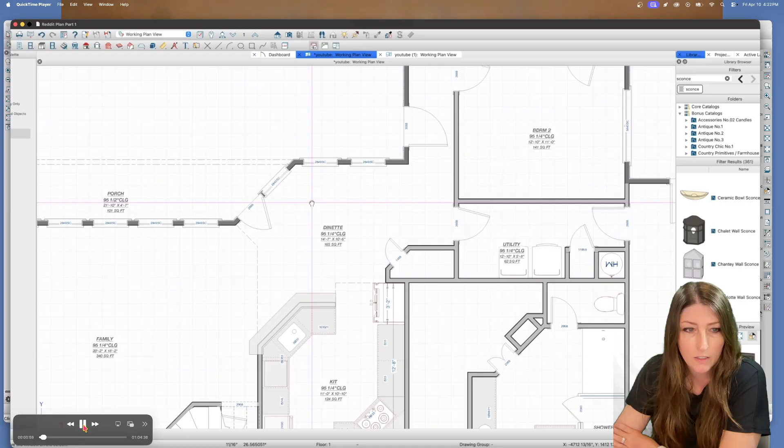And then we go on to the family room, which I thought was fine. This here is also a raised bar. I thought the kitchen was actually very well done, so I pretty much left it alone and then just made it look nice in the end. So this is a fireplace here.

So what do you guys think, first glance? Is it weird to you also, as it is to me?

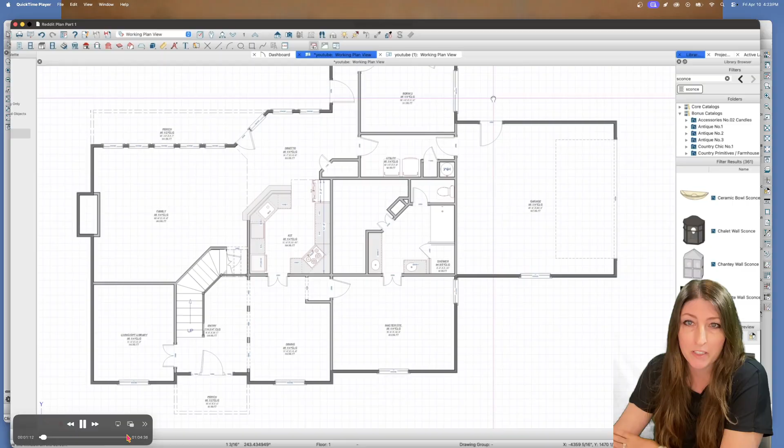Yeah, that's the plan, I'm going to redesign here. So I'm probably going to fast forward some. There's the second story right here, and this is what I'm going to show you in another video. It's showing a reference display, so the red is the main level, and it's showing you how these walls line up. That let me know on the first floor which walls I'm going to keep because they're likely load bearing.

In this case, you can see these rooms all lined up with the lower level, the main level. Right here on the original plan, it had this door, and this is a closet, which I thought was really strange too - again, that'll be part 2. Right here, they implied there's possibly another water heater and maybe a furnace, but other than that there was no other room for mechanical stuff, which I thought was weird.

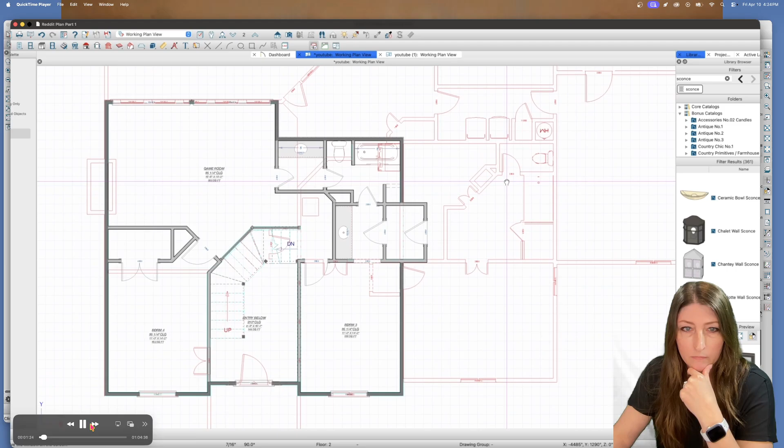We'll keep going though. So here's where I start to rebuild it. My goal was to create a hallway for the master bedroom. As you can see, I deleted this door.

I thought, okay, what I would like to do is move this bedroom and put it up where that bathroom was at, and then put the bathroom lower so that it's easier to access for everybody. Because if I had a bedroom, I wouldn't want it right by the utility.

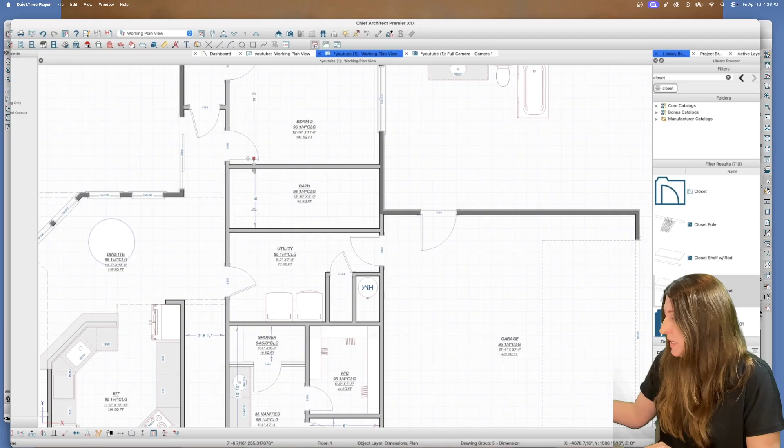Here's where I started to - right here, if I could pause. Okay, so this is where I'm trying to work out how I'm going to do this. I actually started on, I printed this out and started it on paper and tried to sketch it out. How am I going to redo this? I had to do that before I could do it here because it made it a little easier.

So what I did here, I wanted the bathroom and the utility to be back to back, and the bedroom further up, and the closet there. I was hoping I could fit another closet to the hallway this way, but I couldn't, so that door goes away soon. I also got rid of the door that was here, and I put a slider

because I just felt like this right here is such an awkward space - by the time you have people sitting there and an exit, and I understand there's a covered porch there, so maybe there's a better option to have a door in the family room, the living room. So this is me rearranging this area.

And I've also, if you've already noticed, created a hallway right there. I blew up the master bathroom, which is here. And I got rid of the weird little hallway thing in the dining room to get to the bedroom. I wanted this to have its own entry away from all the other areas, so I put a hallway in.

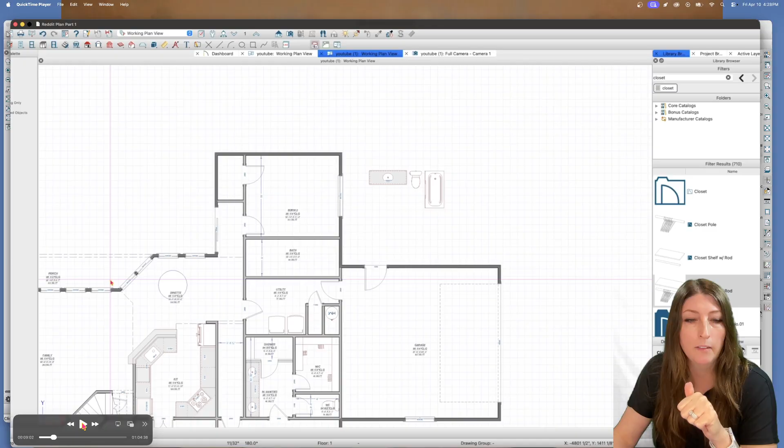I added this water closet here because I feel like when you need to go to the bathroom in the middle of the night, it's easier if it's right there, and then you can just wash your hands and go back to sleep. So that's my reasoning for that. And anyway, I continue to just tweak this as I go.

I wanted these to be color coded, but I learned the hard way earlier when I uploaded this video that even if you record something and color code it and export and upload it all, because of the green screen behind me, anything I had colored green turned black. So I had to redo all of that. Learning the hard way is not fun.

Right here, what I'm doing is reworking this utility room. I wanted it to be bigger, and I wanted the water heater to have its own place, so I made this extra little closet back here.

This bathroom is basically like a 9 by 5 foot space. I just made it a normal size bathroom, but I wanted to try to have some space here for pantry or kitchen storage, since there's really nowhere else to put that.

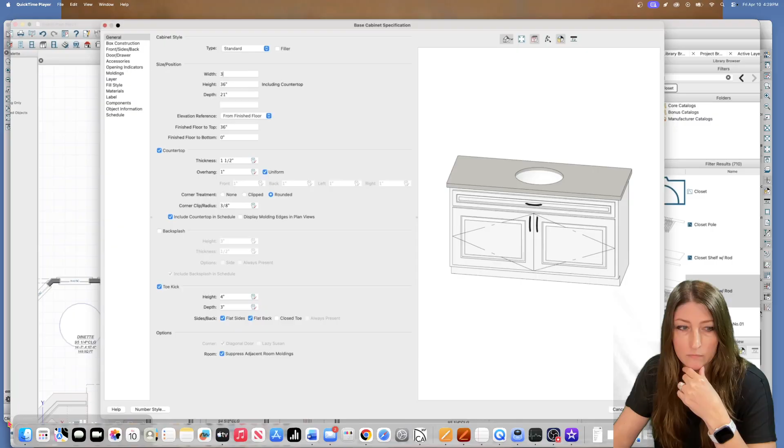So that's just me working on the bathroom, and I actually ended up flipping it. I did a 2x6 wall to vent the dryer properly, but I felt like it'd be easier since you've got the water heater right there and then a lot of plumbing right here.

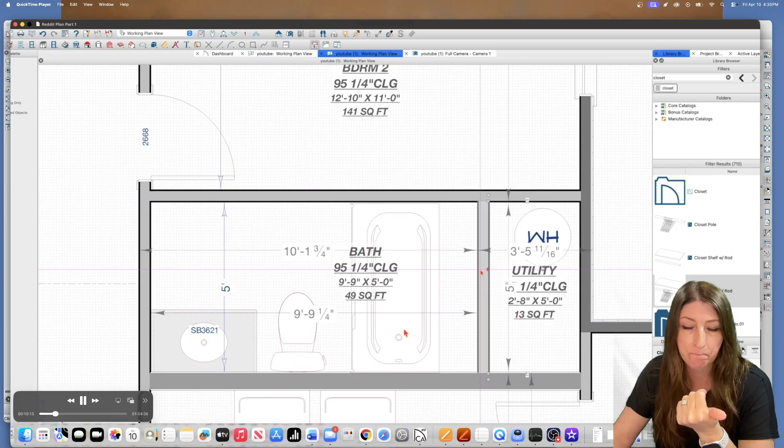It's a lot of fine tuning when you're drafting, just like the cabinet sizes and the overall size of these rooms, and moving the doors and just making it more functional. That's my goal.

If we're going to center something, like I ended up centering this door from the garage, I move things around, and it's a lot of tweaking - oh, should I have a wall there? Should I not have a wall there?

That's why it's important to do it on the computer and have a plan for when you do remodel. Here I'm trying to figure out, is it worth making it bigger? I'm like, I don't think so, because now I'm not going to have room for cabinets here. So I eventually put that back because I wasn't happy with that.

I'm going to speed it up a little bit more. I defaulted all of my cabinets to what I wanted it to look like to make it easier. Then there I am trying to just add more cabinets, and there I centered the door eventually.

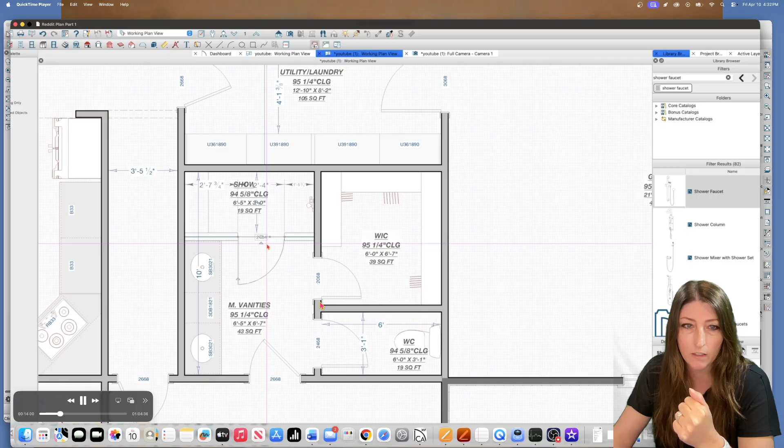Here's more fine tuning. Do we center the door from here to here or not? Do we push it this way? Ultimately, I centered it this way, and I think it looked better that way.

Another thing you could do is a sliding door that has towel racks on it, because the only complaint I would have is where do we put towels. You could put one maybe there and maybe one right there. So that was the only thing I didn't care for when I redesigned this, but I would probably end up doing a sliding door with towel racks on it, and that would solve that problem.

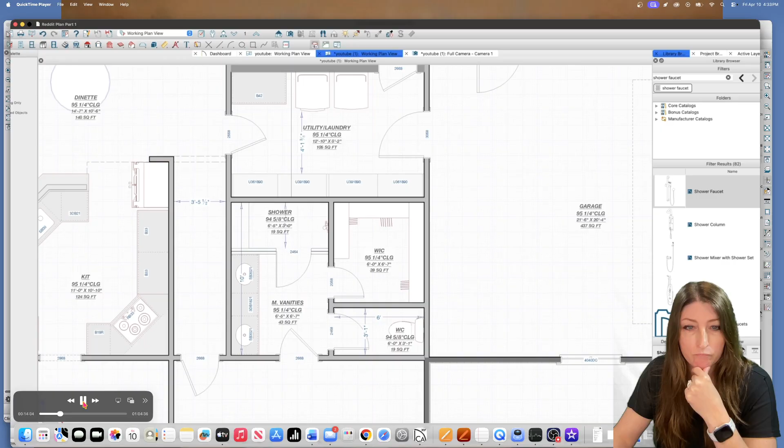So more color coding that I couldn't use. Now we've moved over to the other side of the house. I think if it were me, I'd want this opened up. I think it's important to have good walkways around, and you could still use this as an office or a library or a quiet space if you wanted to.

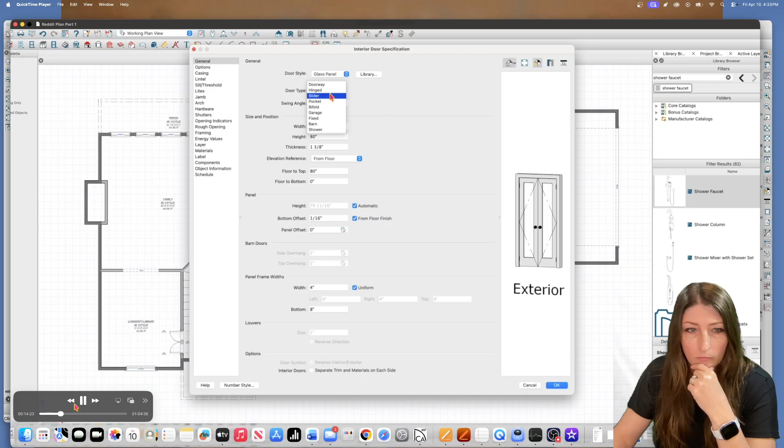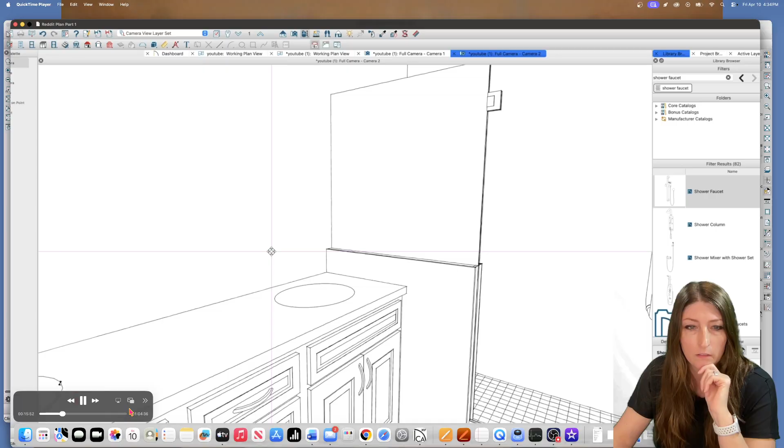It's just more fine tuning, so I'm going to fast forward here. Then I get into the kitchen, so here's some views of what I ended up with on the pantry storage, and I kind of was doing a very simple walkthrough there.

See what it does on my screen? I don't know if you can see that, but it's black. So that's why I had to cut out some of that stuff. But you learn the hard way.

Here I'm trying to just place for size - this is a king size bed. If you notice, I deleted that window that was in the corner by the garage; I thought that was really weird. You could still put in another window that's on the other exterior wall in the center.

Here's a queen size bed. I would say for this size room, you'd be better off maybe with a twin - it'd make a good kid's bedroom. But there's where the window was before, and it makes it so you have a lot of wall space to use.

I'm just trying to find different furniture pieces for size. Chief Architect doesn't have a ton of furniture, so you kind of just have to use what you can. There are downloads from 3D Warehouse, but I didn't do that for this. I mostly wanted to focus on getting the master bathroom to look really cool. Wasn't in love with that dining room set, but I used it anyway. I wanted to make the kitchen look really good, so I just played around with finishes.

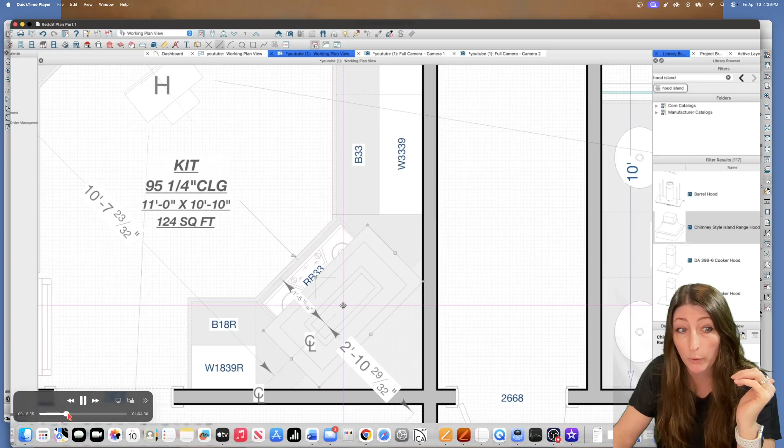So I'm going to fast forward here. Because they have the cooktop in the corner, what I did is I used an island range hood, so it would mount to the ceiling anyway. I thought that was a good solution for that, and I'm just trying to space it there.

So this is more just adding the fireplace, more kitchen stuff. It's a very long process to get to the finish line, a lot of tweaking. But I kind of felt like I really liked this kitchen. They did a raised bar, which is fine. You could do one level if you wanted to also.

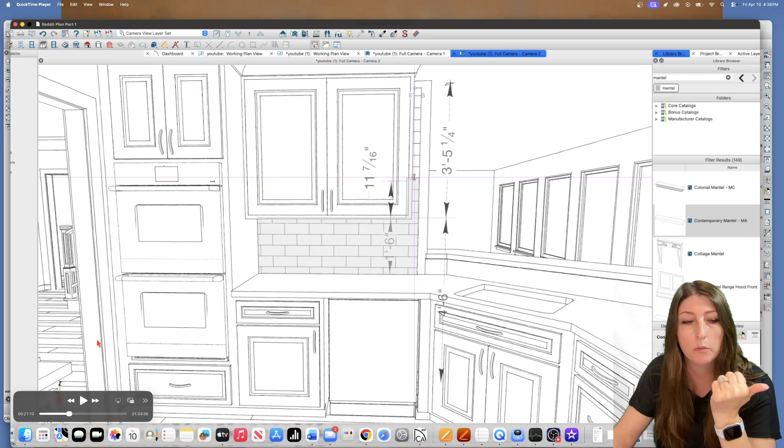So here I was trying to decide, I wasn't happy with that right there. I could have made the cabinet bigger, but instead I actually went up all the way with the tile.

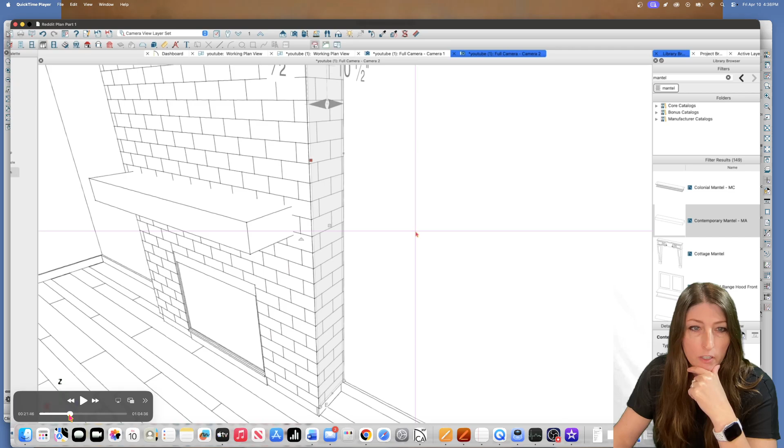It's important too, if you're gonna have crown molding on your cabinets, it's important that they die into the wall properly, so you don't want them sticking out weird. That's really not a good idea, but I'll show you what I'm talking about later.

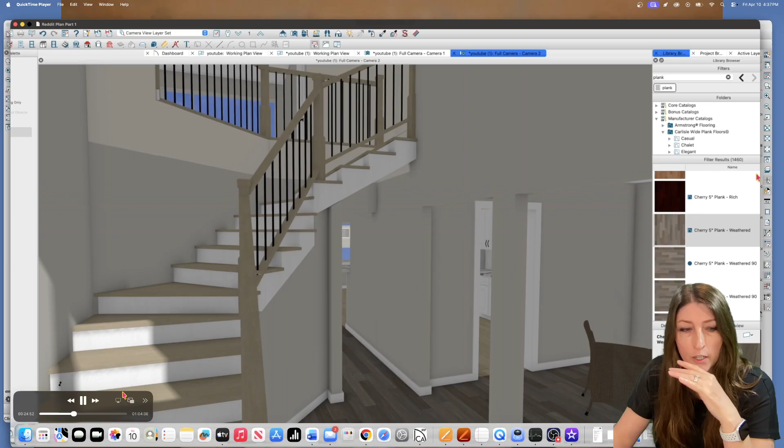Here I was trying to see what I could come up with on the stairs. These are all defaulted wall colors, so the second story I haven't colored it yet, but I was just trying to work through the floor. Oh, I could do two-tone on the stairs, so that's just me coloring that.

And I changed the floor a lot, changed that a lot. I went through a lot of carpets until I found a pattern that I created a while back that I really liked. We'll see if there it is, which I thought was really nice. I thought it looked good.

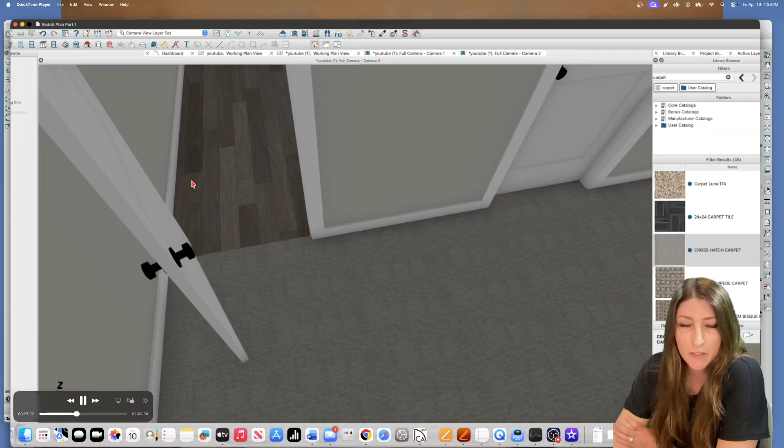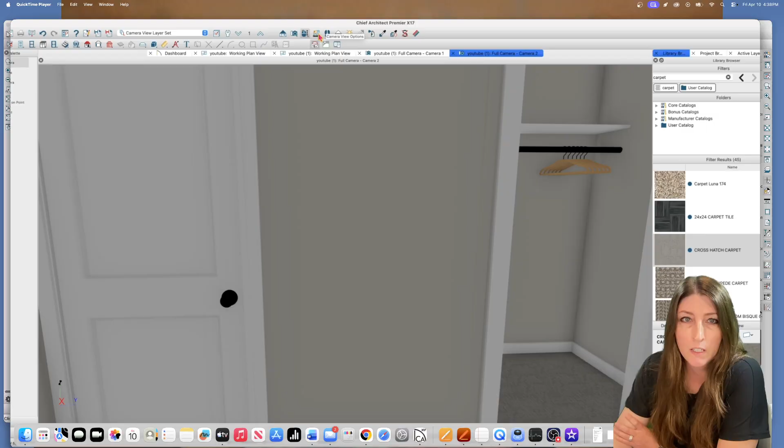But even with the materials, you see me tweaking the materials. You have to do that with all of it, depending on the camera view. Again, just like the last video I did of a layout, this is a standard camera, so it's like your Sims game, video game camera. It's very simple. It's not going to really render a lot of shiny or matte or anything realistic. It's kind of realistic, but not super realistic. And I don't start flipping over to the physical camera, the one that renders really well, like lifelike.

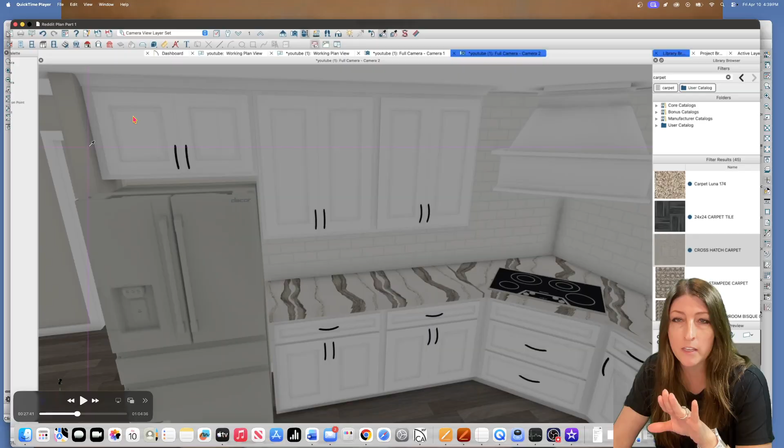Oh, there's a spot I could tell you. I don't flip over to that camera until the very end. So right here, if you could see that, that's what I was talking about. I got rid of that little pantry that was there, or the closet, whatever that was. I left this wall the same size that it was, but I didn't want my molding to go beyond that. So little details like that, I think will really make or break a plan. You have to be aware of that stuff, otherwise your plan's going to look bad.

Eventually I changed this countertop. It's Cambria, I love Cambria. That one's a little stripy. So here I am going through a lot of different countertops to see what I like. I think I decided on that one eventually.

But yeah, we'll fast forward some more. I thought, oh, what if we did a dark one? I didn't like that. So it's a lot of tweaking. Then I go back to the other rooms.

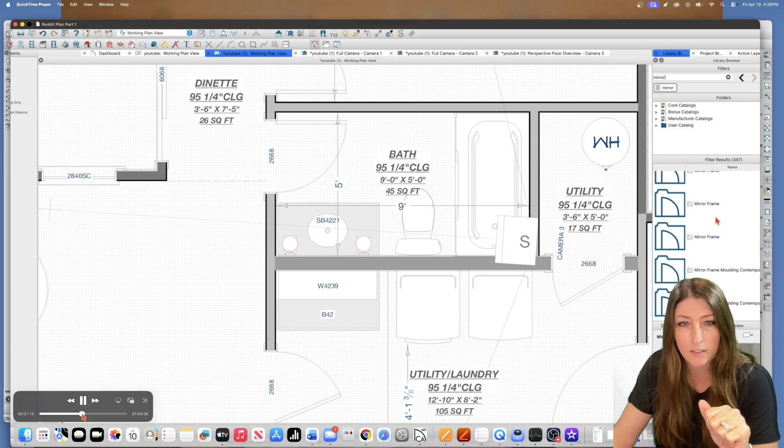This is the little hall bath. So what I did in here, I ended up doing wall sconces, single sconces on either side of the mirror. I thought that would look really good, instead of just doing one overhead. Sometimes that gets kind of boring after a while.

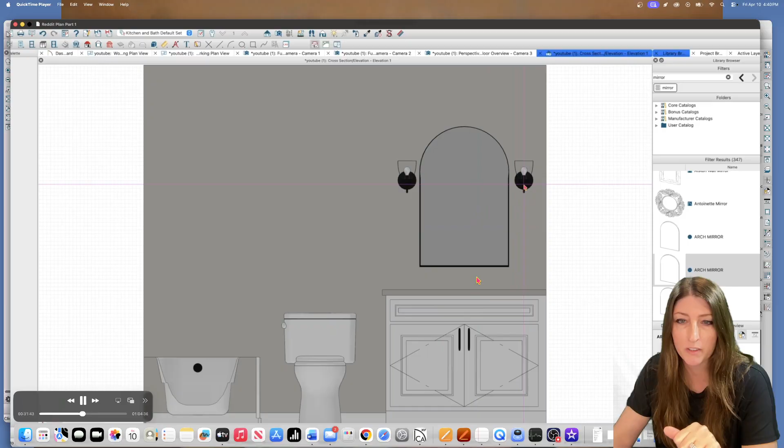So that's what that looks like. Something different, a little arch mirror, and I created that mirror actually in Chief Architect. And then eventually I'll change the backsplash to the countertop material. I thought it would look better.

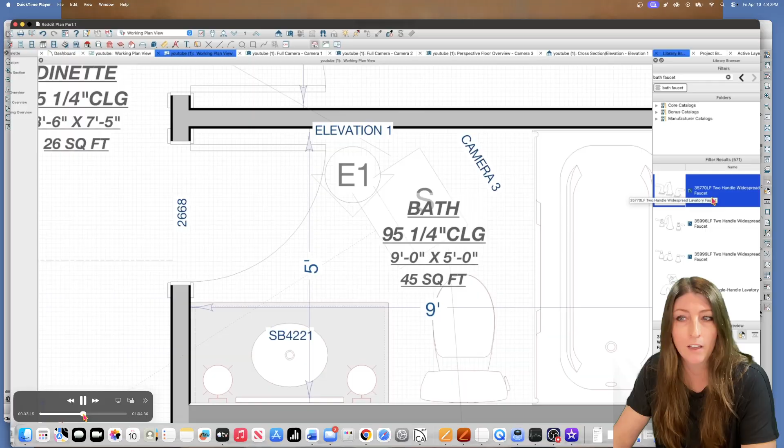So yeah, a lot of little details, you guys. It takes a while. And again, this is a whole main level, so it would take a while if it's the whole house. And then I will do the second floor because I think it could be better also.

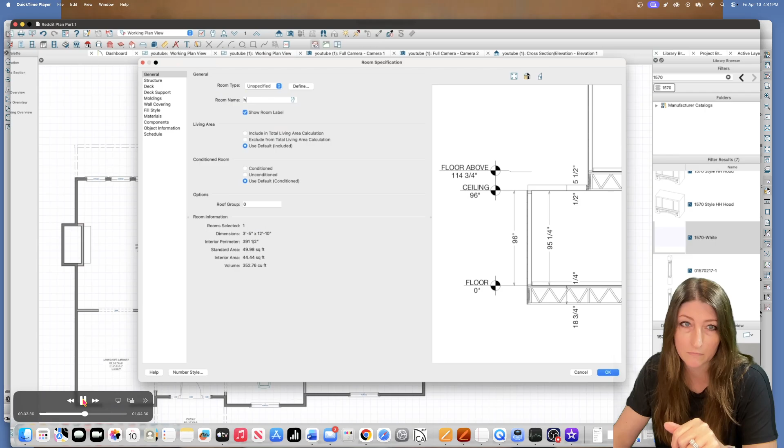So it's just more fine tuning. So let's see here, and that's the master bathroom. So here again, I was playing around with countertops and like, what are we gonna do for the side splash? And eventually what I do is on top of this ledge and on top of the curb, I do the quartz material. That's what I'm doing there. Doing a curb. And it looks really pretty.

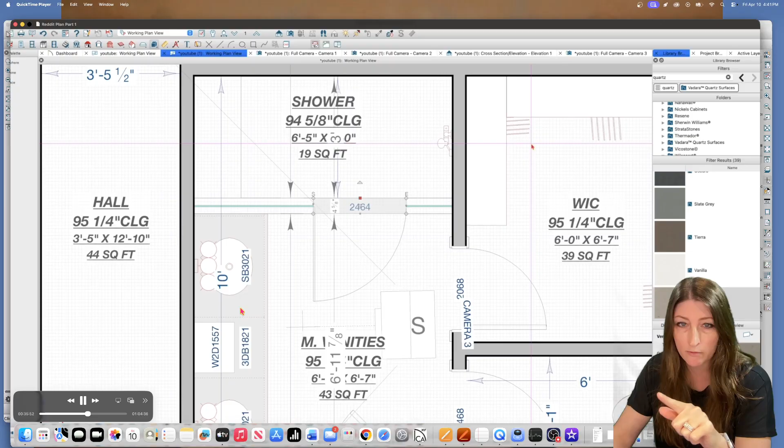And what I'll probably do is flip over to Chief Architect when we're done flipping through this here. So there I started to do a curb, and I'll change all this material because I didn't like it. I do like the countertop material, but the tile that's in there, I changed it because it just defaulted to that. But I loved the countertop. I thought it was really pretty.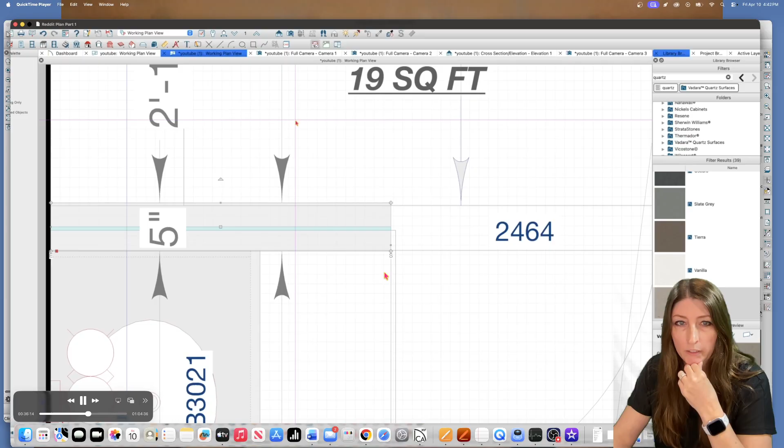And you'll see me in these videos using a lot of neutral colors, and that's just because I don't want anything to be overpowering. I just want everything to be cohesive is all. I want it to complement everything else. So

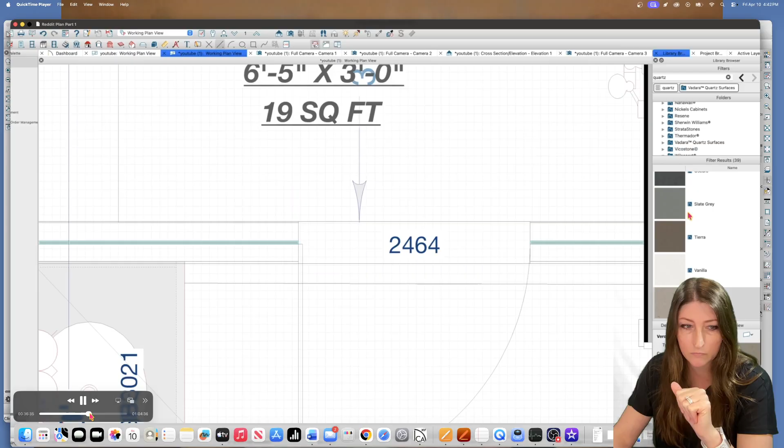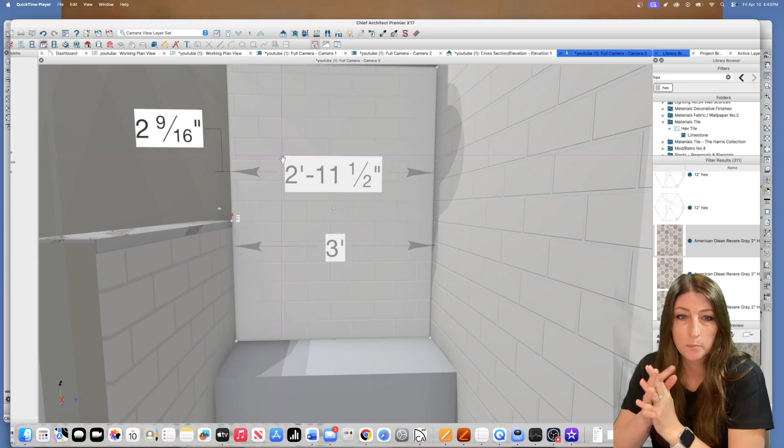And then I'm tweaking the bench, and I ended up making my own tile for the walls. That's not it there. But I love subway. I think it's a classic material to use, and I don't think it ever goes out of style. But for this, I wanted a different kind of subway. And here I'm just sizing the wall height. And I ended up at 7 feet.

For this main level, I just left everything at 8 foot. I have no idea what the original plan called for. It didn't say, so I just kept it really simple. And what I wanted to do is make sure over here I came over, because you're going to have glass right there that needs to dive into the tile. And eventually I just keep tweaking all of this.

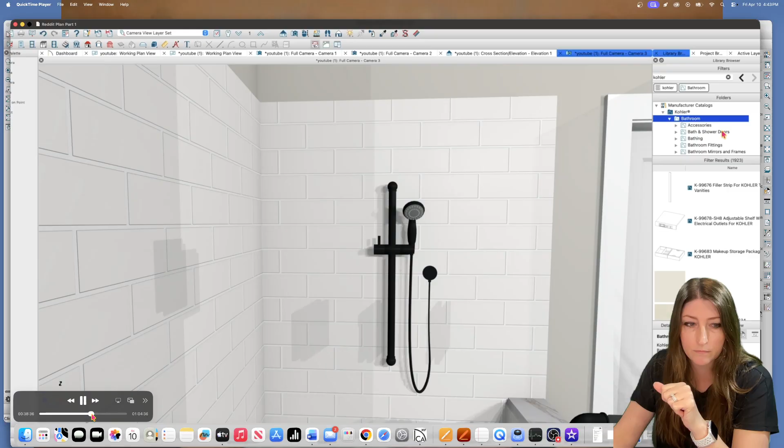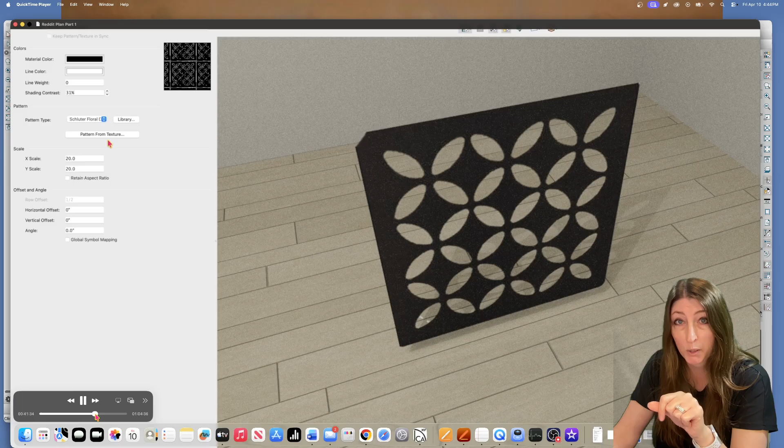That's the tile that I'm making. It's a little bit different subway. I ended up at a 4x12. And then here I am making my own shower drain. This is actually a Schluter floral drain. I always really liked this drain, and I made my own. So there's a shower drain. But it just goes to show what you can do here and how much detail you can put in.

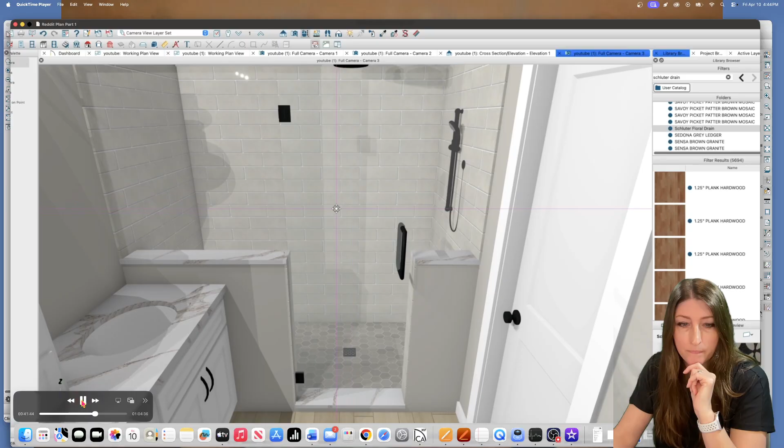But right here, so side splash, backsplash, I was trying to figure out, okay, how am I going to treat that since I have this on the ledge? And I ended up doing the tile, the 4x12s. And I added a wall niche there. That's what this is.

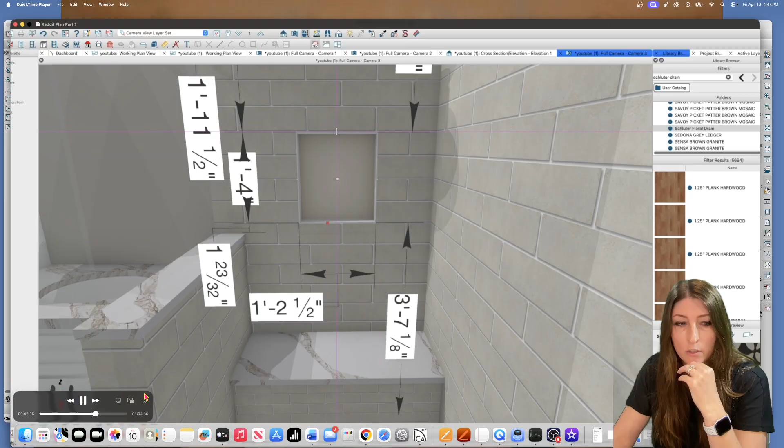Now, what I wanted to do here, so if you're really picky like I am, I want things to line up, and I said that in my last video. So I brought this to the top of this row of tiles, or bottom, top and bottom, whatever, so that it lines up. So that's what I'm doing there. I'm just lining it up.

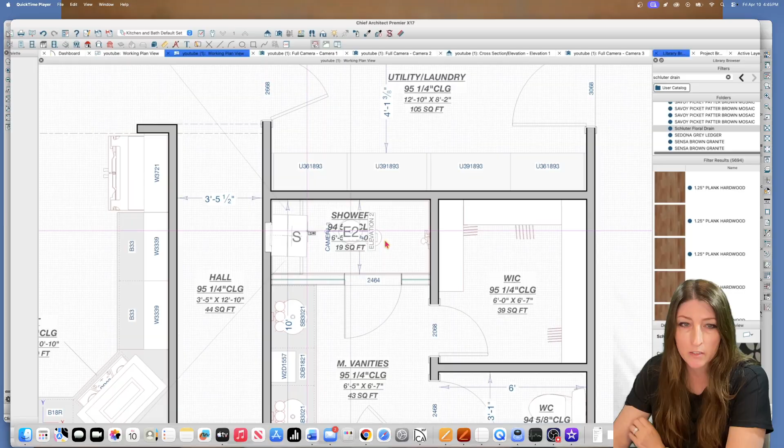And I made it taller, and then I'm going to add shelves to it, and I'm going to make the frame out of quartz. I could have done the wall tile, but then I go on to add the little shelves too. And wall niches are nice because for the most part you can make them just about any size as long as the framing allows for it, and it could be reframed too. And I could have added some on the big wall, but I just didn't for this one. So just tweaking the shelves there.

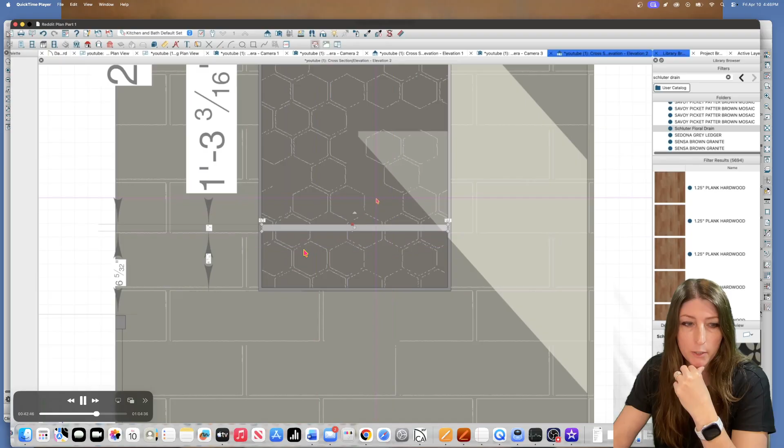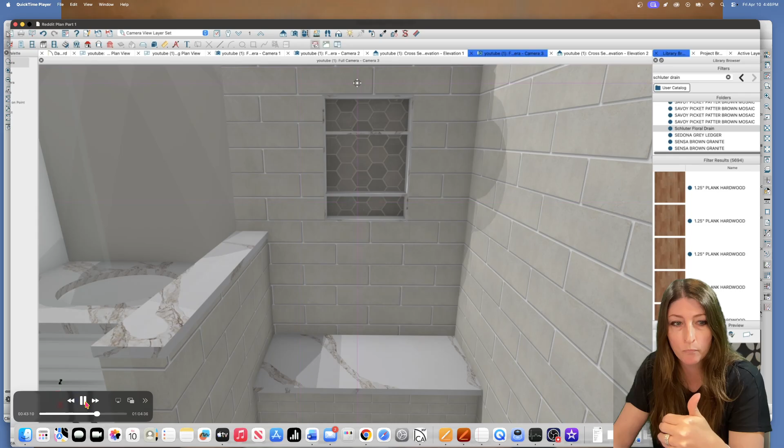But this is the amount of time it takes and the amount of work it takes for drafting. And it's not just drafting. I mean, this is rendering it in real time too. It's modeling it as I'm drafting things. So, but all of these things matter. And if I were to do this in an actual plan, then all of those dimensions would be specified, and I would pull all of those.

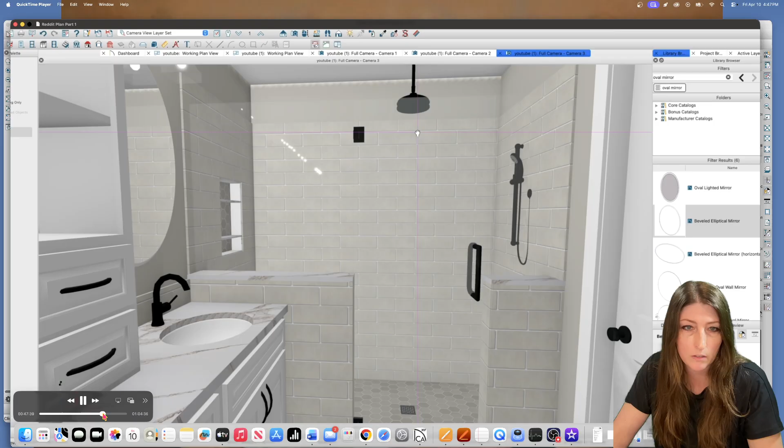So here's where I was trying to figure out, what do I do there? And I'm going to fast forward here. So I ended up just doing the same tile. And maybe it's too much tile, I don't know. But I was okay with it at the end, so. So I want to fast forward to... I also added a rain head in the bathroom. You can see it there.

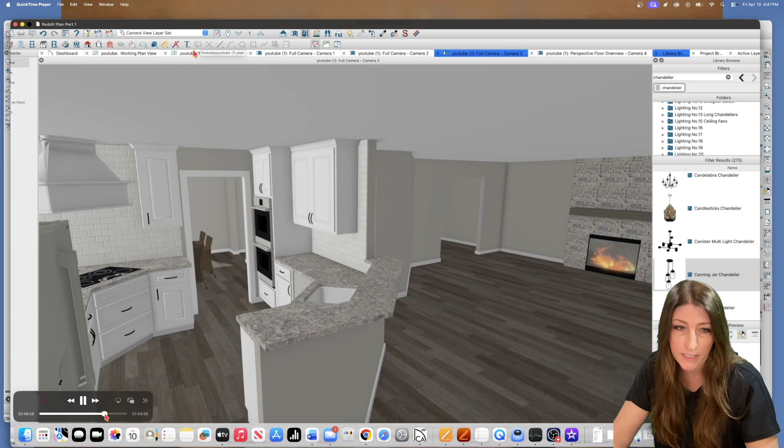And eventually I start putting lights in, like chandelier, other pendant lights. And I do that so when I'm doing my physically based rendering camera, it lights it up realistically. So just fine tuning the lights there. I thought it would be kind of cool to have a cluster pendant above the sink. There's a lot of open space there. But then I thought the sink was too small, so I made it bigger.

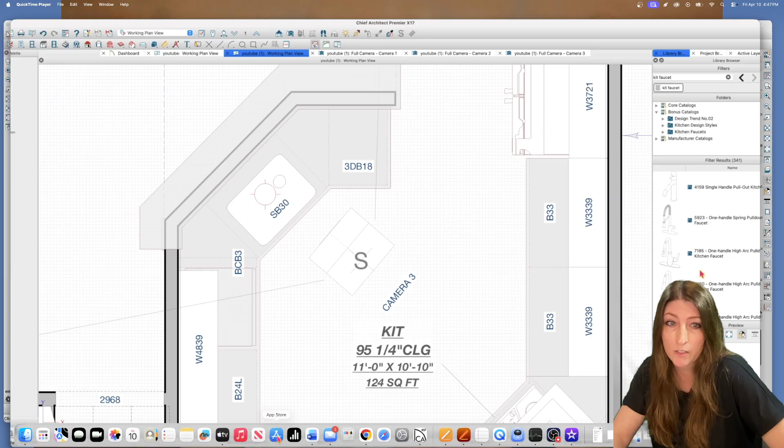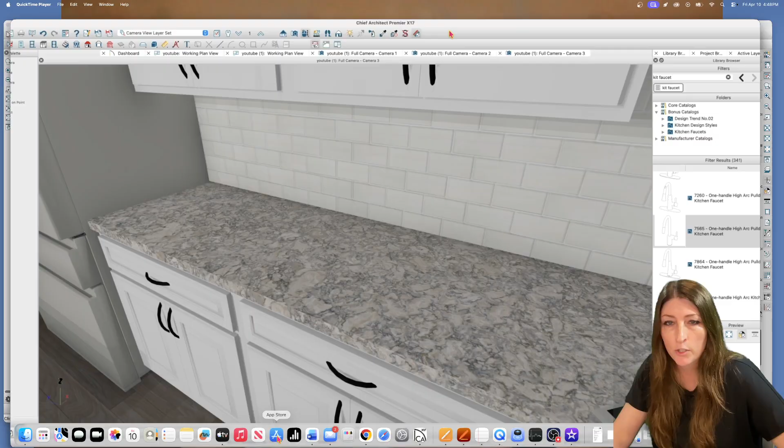But yeah, you guys will have to let me know what you think of this plan. If you like mine better, if you don't, it's not going to hurt my feelings. I have really thick skin, so. But I felt like there were good things about this plan and not so good things. And I think that goes with any plan. If you're trying to remodel, there's only so much you can do. So if you can improve just 10% of it, I think you're ahead.

And so here I'm flipping back and forth between my standard camera and my physical camera, just tweaking that. And you can really start to see it come to life with the windows, the daytime lighting coming through the windows. So just trying to pan around. Let's see here.

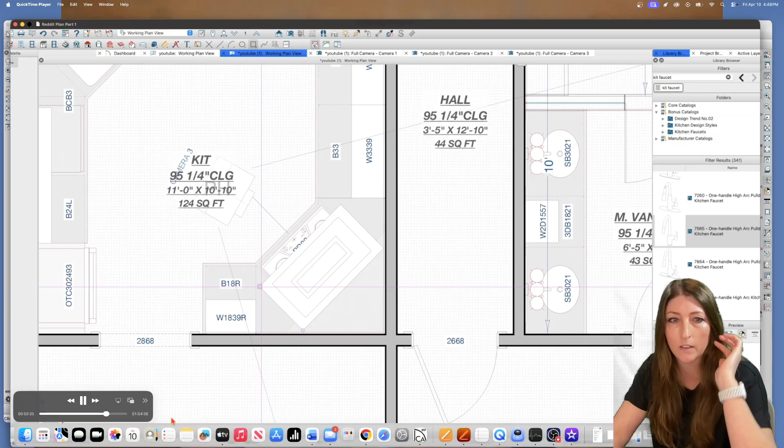And then I was like, I think it'd be kind of cool to do some lights under the range hood as if it had its own lights. So I just did a polyline, turned it into rope lights, and then adjusted the rope lights and set it to the right height. And then I was just trying to see. So that's what it looks like there.

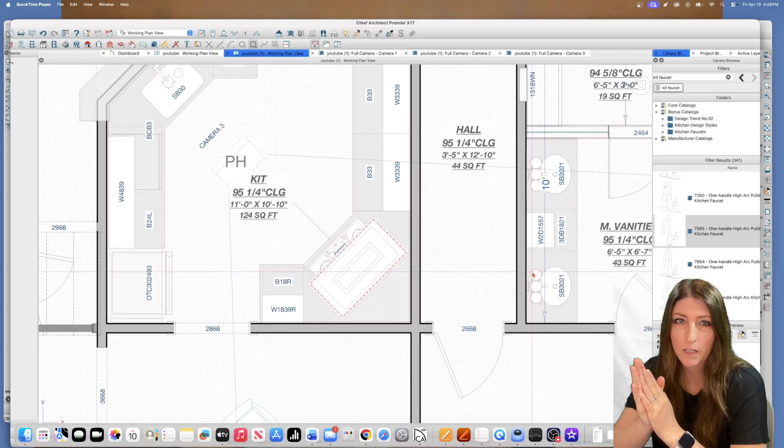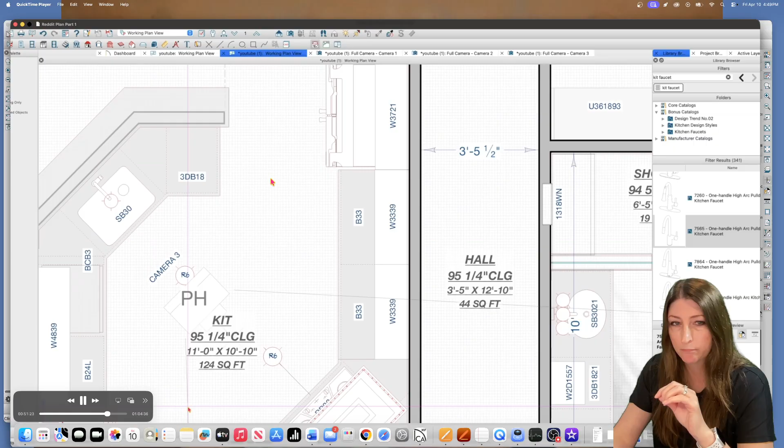And as I said in my last video, when I was going over a layout, with the physical camera, I have to denoise it, which that's what you're seeing there. It's staticky, but then I have to go in and denoise it so that it comes to life. And normally I would place these a little more precisely, but I just wanted to get some more lights in there for the camera's sake. And so I had to bump up my number of lights because there were just not enough. It's like some turn on and some don't, but I wanted them all to turn on.

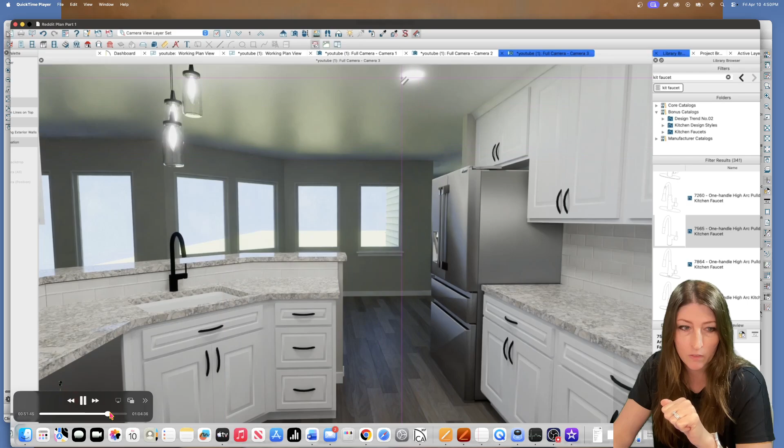I'm going to keep going here. I also added some stone on the fireplace. Would you do a different material? Do you like the stone? You'll have to tell me what you guys think.

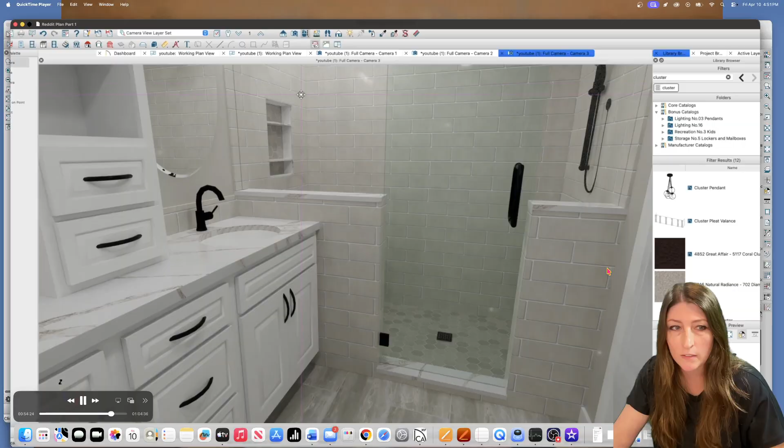So it's getting to the end where I'm just fine-tuning stuff and I'm just adding more lights. I'm making sure my countertops look polished. There's a look at the bathroom. I changed the floor. And I'm really just trying to get it to look really good. There's a lot of settings too.

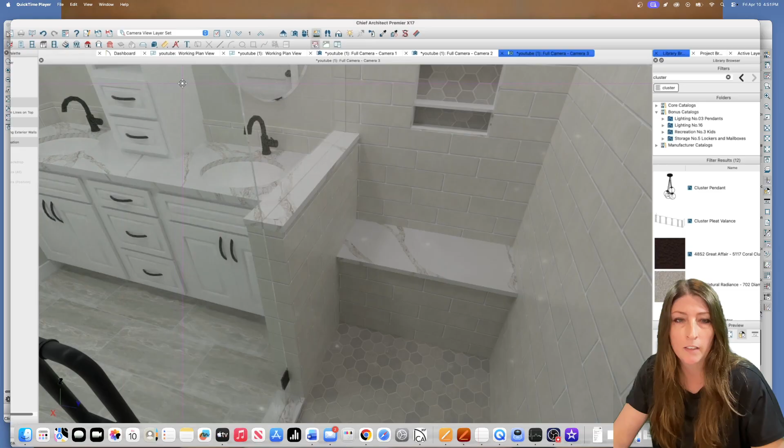I ended up changing these vanity lights because originally I had them pointing up, which is not really good if you're trying to use your sink and get ready. And so I picked some different ones out so that they were pointing down. And do you guys like this cabinet on the countertop there? Or would you just as soon not have it? So that's the different fixtures.

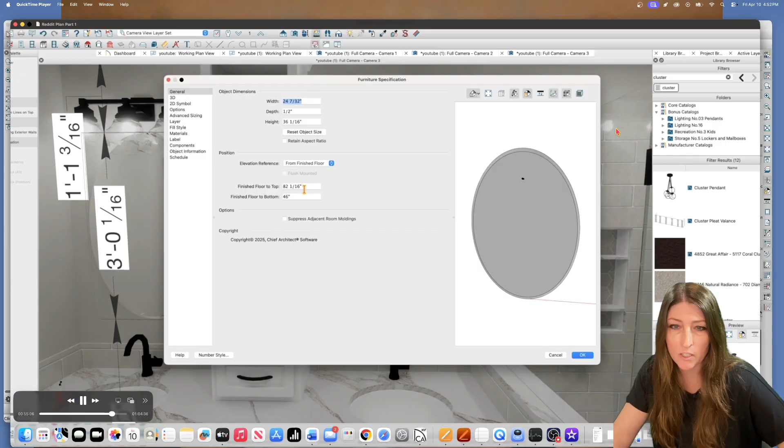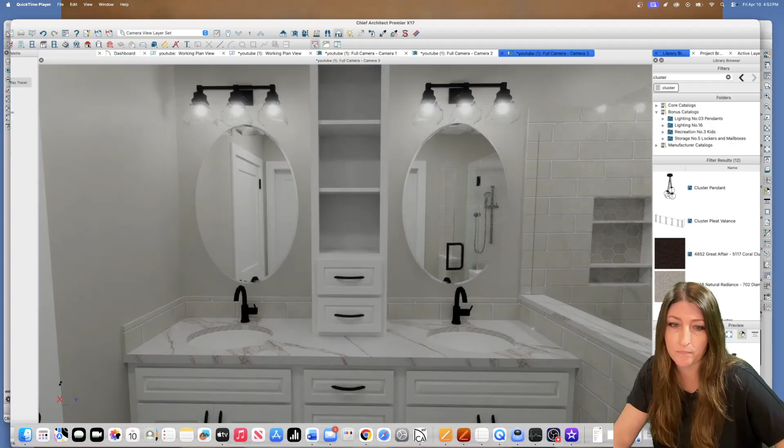But it just kind of goes to show the amount of detail we can go to if you are able to pick things out. Just like I said in the previous videos, hardware, lighting, fixtures, all of that stuff matters to your design and to your space and how you're going to use it. And you know, some of you may hate that, and that's fine. It's not for you then. But here we go down the hallway.

And I think at the very end, after I got done placing lights, I thought, I could probably add some shelving in here, which I ended up doing. But it's like the more I look at it, the more stuff I want to add, which I think is fine. So here I am. And then I switched these two around. I don't know if y'all have a preference, if you'd rather have the dryer on the other side, but the door appears to open this direction. So there I am adding shelves.

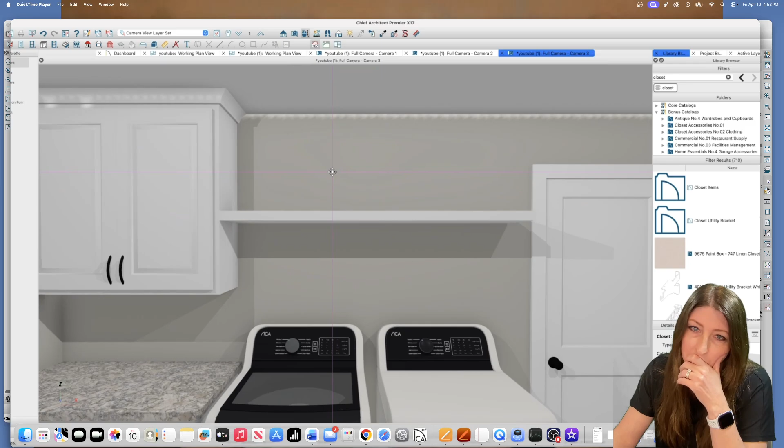Which I thought would be nice to have. And maybe some of you wouldn't use those. Maybe you'd rather have shorter cabinets.

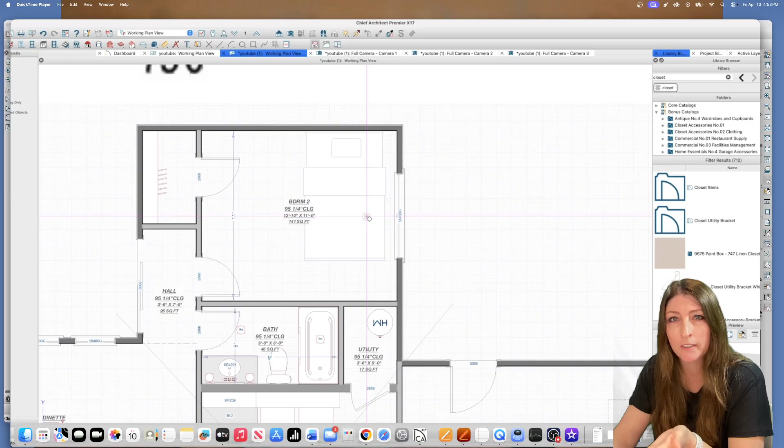I will say one thing when it comes to lighting we don't think about is adding one above your tub. I think a lot of people have like exhaust fans with a light, and sometimes that's not bright enough, especially for older people. They need to be able to see, obviously. So don't overlook that. If you can add a light above your tub, then I would certainly do that.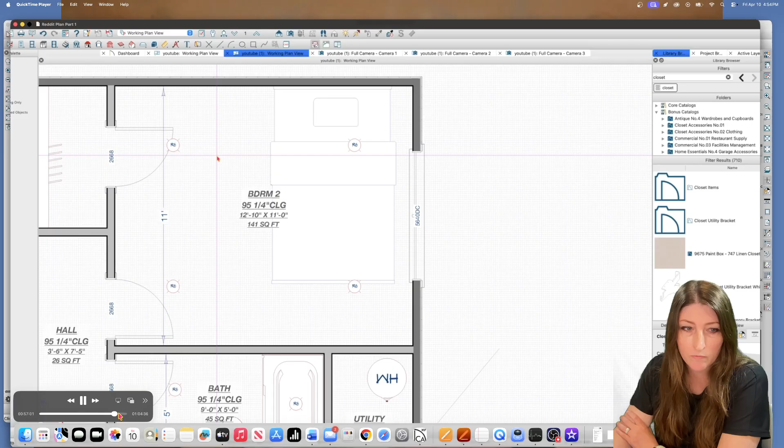So it's kind of towards the end here. I think where I'm just kind of placing more lights so that it lights up. And then I kind of walk through really fast. That's the standard camera. Then I decided by the front door maybe we could use some sconces there. So I added a couple there. Now this entry actually opens to the second story, so it's actually very tall. See?

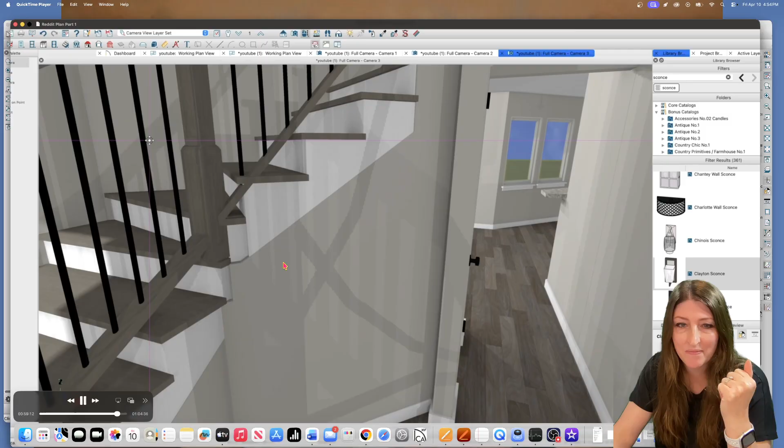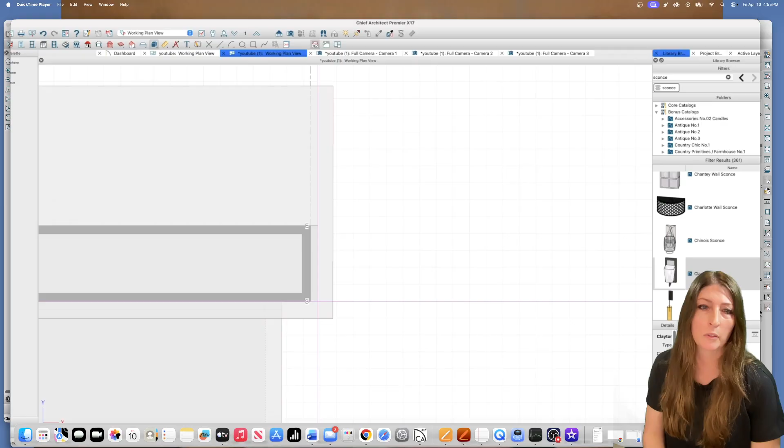Then I'm just kind of checking last minute stuff. I noticed there was like no trim for some reason right here. Little things like that drive me crazy, and that's kind of a Chief issue. Sometimes their wall intersections don't work very well, and it's because I have what we call a room divider coming up to a half wall, and for whatever reason it doesn't want to put a piece of trim there. So stuff like that drives me nuts, so I had to put a little piece of trim right there.

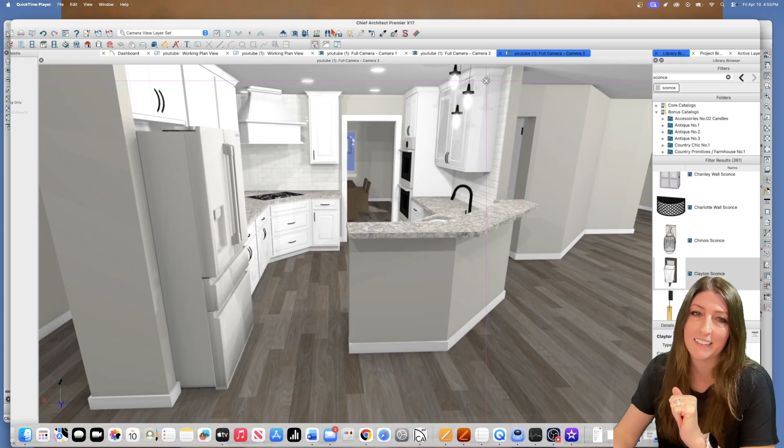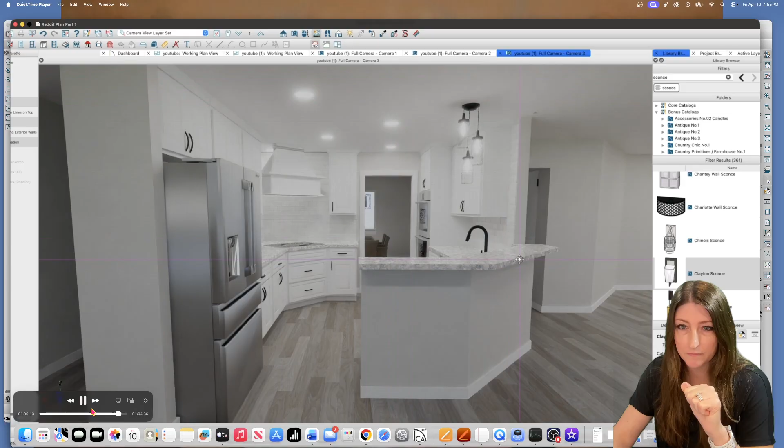So there's kitchen. It's a little grainy there. And it takes a second to denoise it. So then I just kind of try to walk around, and so there's the entry. So I think it's a really pretty entryway. I had no issues with that. I think these would be kind of cool if they were stone to match the fireplace. So a lot of light there. I think that's really pretty.

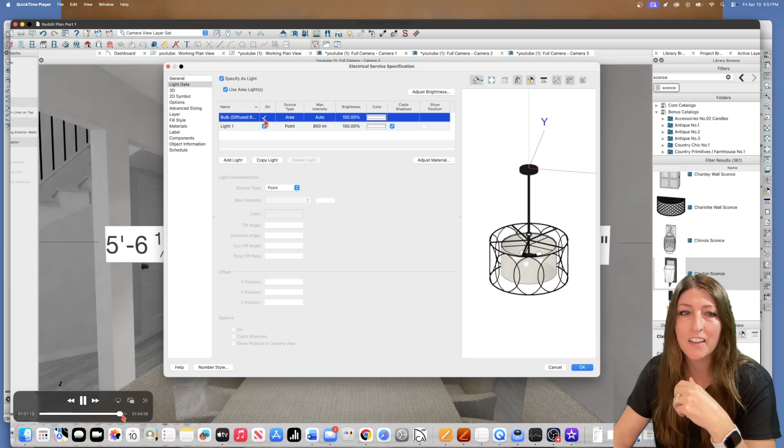There's the hallway and the closet that you can't see. The staircase was not fun to try to draw, but I got it. And for some reason I couldn't get that light fixture to light up. I don't know why. It's just very dim for some reason, even though I bumped up the lumens on it. You can't even tell. I think I had it at like 850 lumens, and I don't know why. It just didn't want to light up very well. So, but then we go into the kitchen.

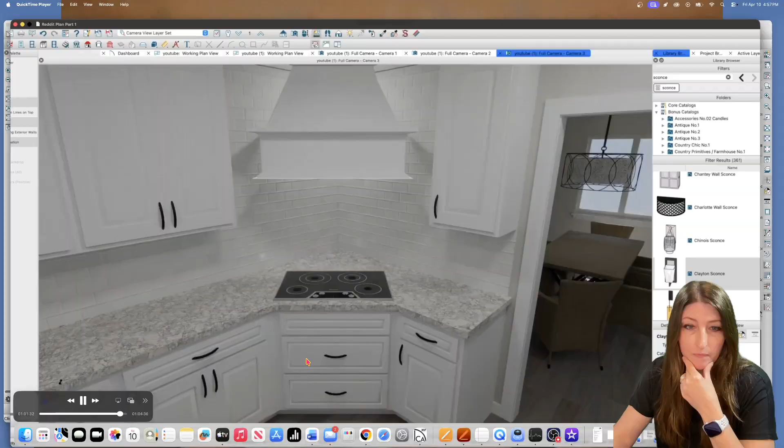So yeah, you'll have to tell me what y'all think about it. I think this was a really fun one to do, and hopefully I made it better. I feel like I did, and like I said, it's give and take in a remodel. Unless you're going to add on to your house, then that's obviously easier. But a lot of people can't do that. So if you want one space to be better, then you sometimes have to take it from another space. So yeah, let's see. Just more tweaking of lights.

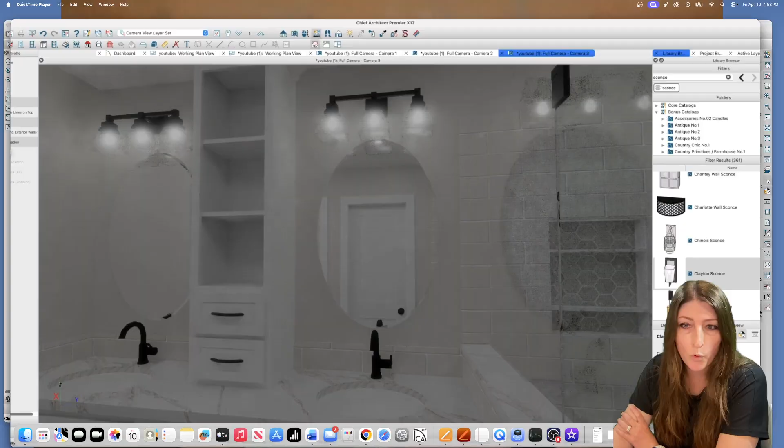There's the bathroom, which I think turned out really pretty. And again, it's going warp speed, so I understand if you can't see everything. And this, like I said, this was 4 hours, and that doesn't include the time I spent working on the as-built. So here we have before, and here we have mine, the after. So you'll have to pause and look at this, but you can really see the differences. And like I said, hopefully I made it better. You have to let me know what you think.

But this to me didn't make sense. This didn't make sense to me. The bathroom was kind of awkward, and this closet was huge, which is nice, but I think it could have been made better. So that's what I did over here.

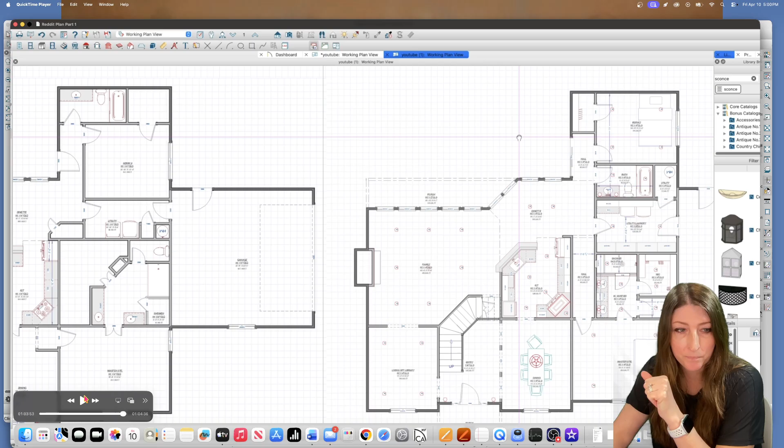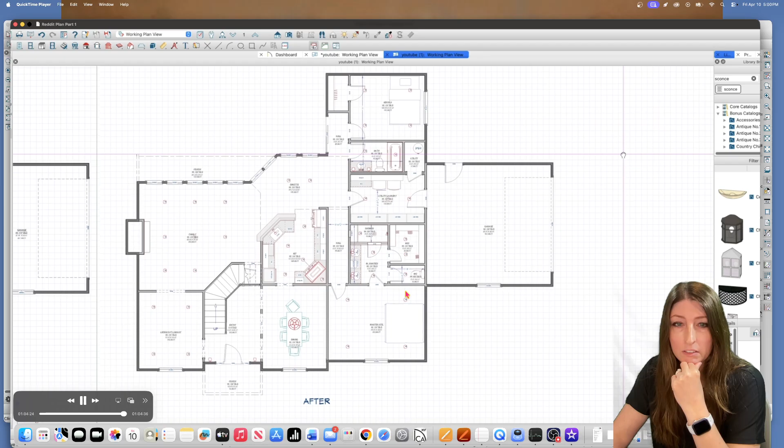And let's see, do you guys like the way the bedroom is more up here? If we were to pause it, instead of having this bathroom way over here for everybody to use, it's a little further down. Would you even have an exterior door there, or would you rather it be there or somewhere else? Hopefully I did it justice. I think we did.